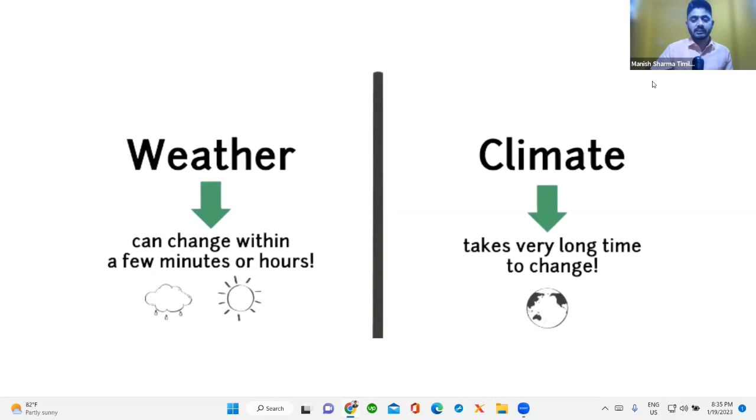Whenever we talk about weather, we talk about a very short period of time, it could be minutes or hours, and we could see several weather predictions based on that. Whereas when we talk about climate, it's a long range of time, basically 10 to 30 years, decades of time. When we talk about climate change, we are not worrying about today it's sunny, tomorrow it will be rainy, a change in weather. We are not worrying about that. Our basic worry is about climate, the change in the climate that has happened over decades.

For example, if this month it's sunny, or it's summer or winter in this month, we would expect next year at this time to be summer or winter as well. But unfortunately, there is a slight shift in the weather continuously. For example, the weather that used to be in January is not the weather it is right now. The weather in January 30 years back is not the same now. And that is what we are worried about.

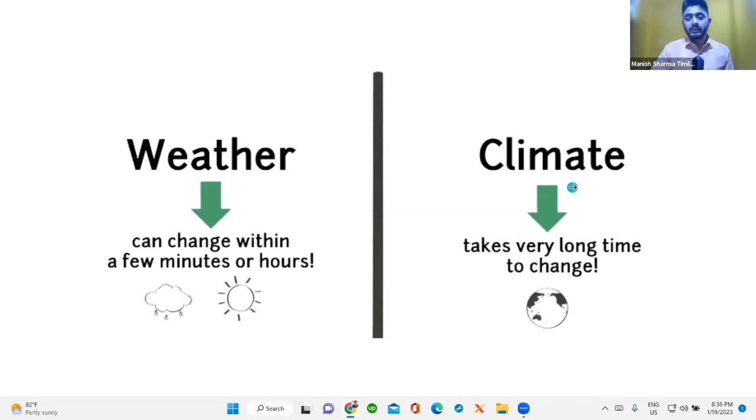So let's talk a little bit more about climate change and its global problem. Before that, we also need to know: is climate really changing, or is it just a buzz topic around the world? Let us figure that out.

Now let us talk a little bit more about climate change.

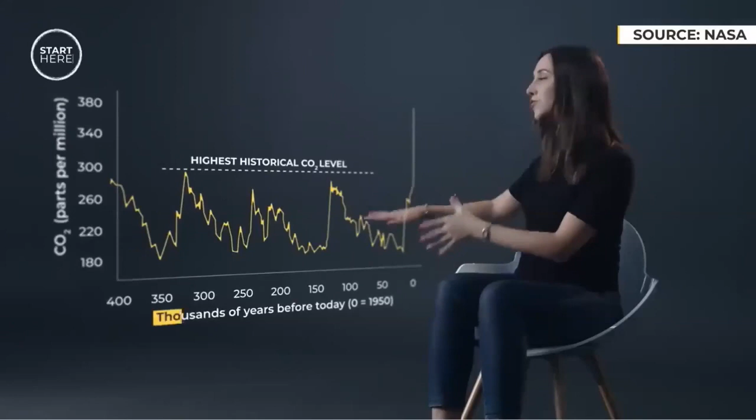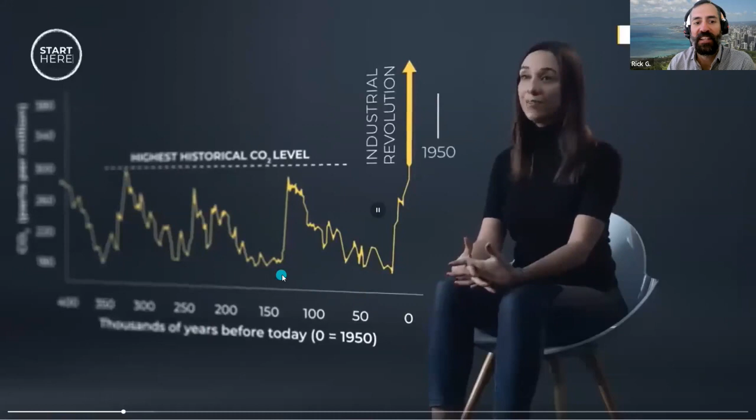I'm not hearing... dioxide, you are not hearing? That took off during the Industrial Revolution, we started breaking CO2 records. Yeah, now we can listen. Manish, do you want to restart the video? We listened to the last 5 seconds, so if you want, you can restart the video from the beginning, if you're able to figure out the sound, because we heard the sound at the end. We didn't hear it at the beginning, and then at the end, the sound started coming in.

So for the video itself, did you hear the sound of the video or just my sound? Yeah, when it first started, I heard like half a second of sound, then it went silent for like a minute, and then at the last 10 seconds we could hear it again. Okay, all right, I understand. I hope now you will be able to. I'm sorry about that, I hope you will be able to hear it now, maybe. Fix it. You can hear it, right? I'm going to take this off with some basics, bear with me.

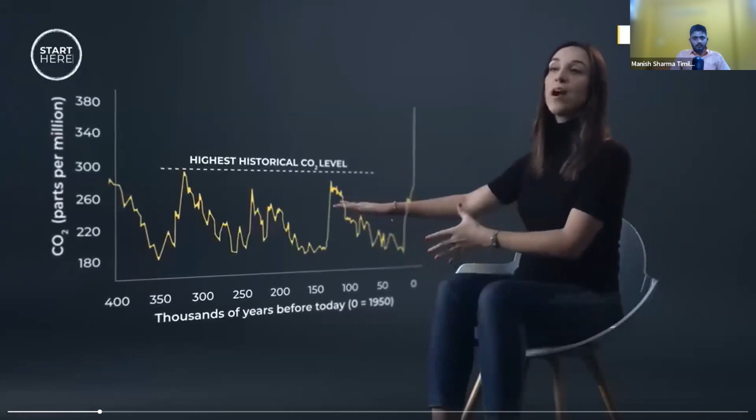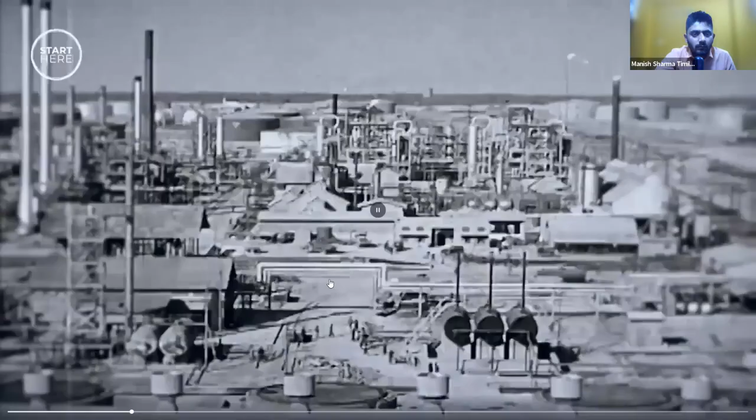This is important, look at this graph. These are the levels of carbon dioxide in our atmosphere over hundreds of thousands of years. But this spike in carbon dioxide at the very end, that took off during the Industrial Revolution. We started breaking CO2 records in 1950, and haven't stopped since. Why? Well, scientists say there's a 95% chance that human activity is the cause.

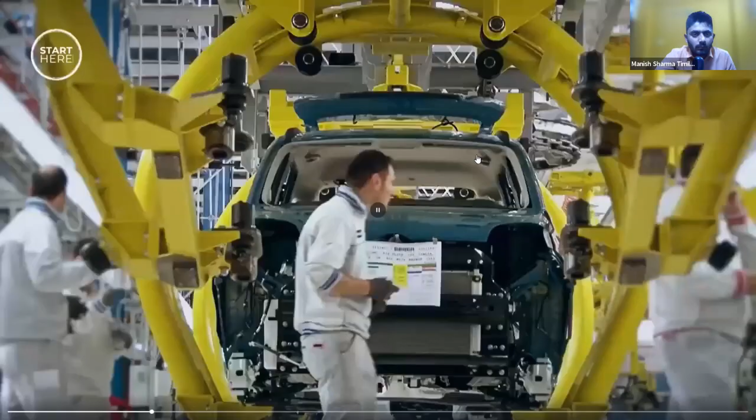We've been burning more and more fossil fuels like oil and coal, which release CO2 to power our homes, factories, airplanes, and cars. There's also a lot more of us—global population has tripled in the past 70 years. And we're consuming more products from animals that release another pollutant called methane. So all those gases are released into the air, and when sunlight gets into the Earth's atmosphere, some of the heat gets trapped and the planet gets warmer. That's why they call it the greenhouse effect.

But the concern is not that the Earth is getting warmer, it's that it's happening far too quickly. It's actually the warmest temperature on Earth since the last ice age, 10,000 years ago. The UN says that right now, our world is about 1 degree hotter than pre-industrial times—that's around the year 1800—which is okay. In fact, the UN says if we warm by 1.5 degrees before the end of the century, we should be fine. The UN even says 2 degrees would probably be all right.

But again, the problem is speed, because right now we're on track to hit 1.5 degrees in only 10 years. And if we don't slow that warming down, it could mean catastrophe within my lifetime, maybe yours too. And we're already getting a taste.

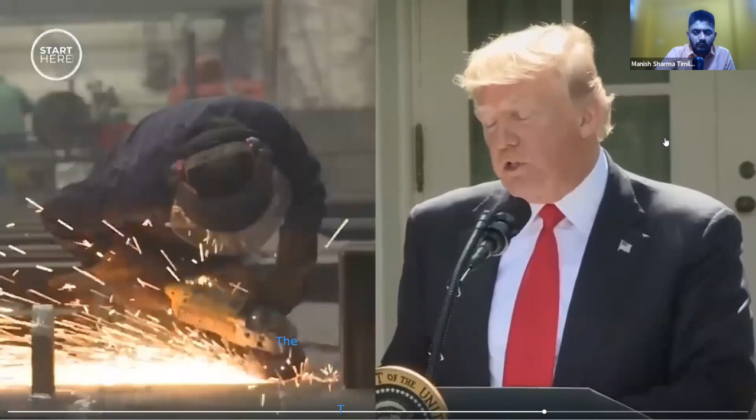The United States will cease all implementation of the non-binding Paris Accord and the draconian financial and economic burdens the agreement imposes on our country. The US, one of the world's biggest polluters, has pulled out of the Paris deal. Russia and China are accused of not giving themselves ambitious targets in the first place. Turkey and Poland want to build more plants.

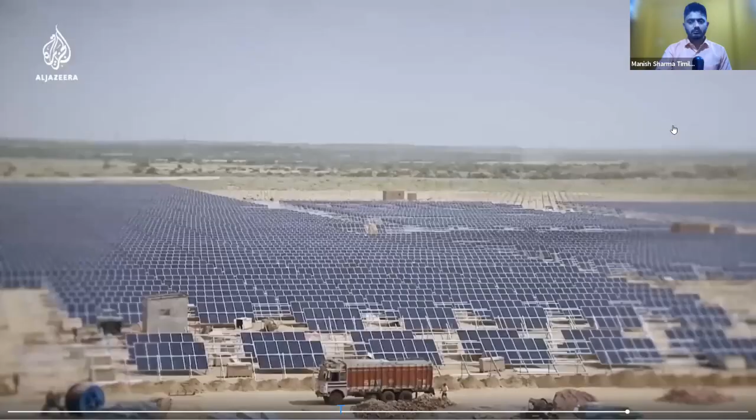On the other hand, there is positive momentum. There's more awareness, and some countries are making progress. India, Morocco, and the Gambia have massive renewable energy projects. So different countries do things successfully. Some countries are, for example, making public transport free in the cities. What a great way to encourage people out of their cars.

But experts say what's needed now is an even bigger push to change everything about the way we run our world. Business as usual has got to change. Politics as usual has got to change. In order to combat that, we have to change the system that has allowed it to happen. You can't have infinite growth on a finite planet.

Everyone can help by shifting to renewable energy, reducing the use of cars, using trains more, cycling more, eating less, and consuming a bit more carefully. So where does that come from? There's only so much bike riding and light bulb replacing that you and I can do every day. The truth is that it's those everyday things that are going to change anyway.

Even coffee could run out if farmers can't grow it. So the expert advice is that it's down to all of us to change our ways and shake things up. Or climate change is going to do it for us.

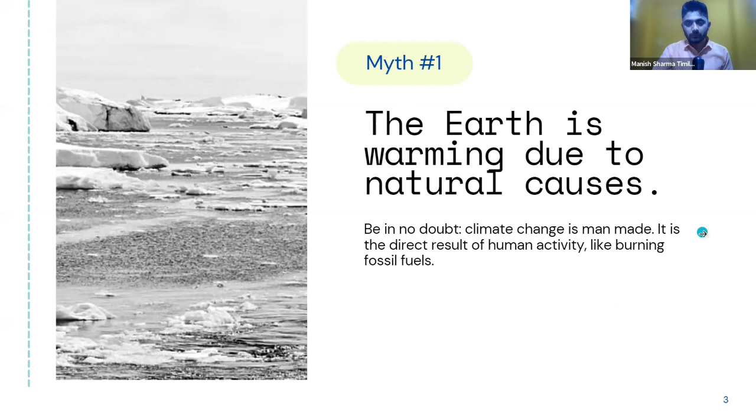The next myth was that scientists don't agree on climate change. We have seen the statistics that invalidate this, and we could see from this fact that climate change is very real, and we must act, we must think about it.

Another myth is that life will adapt to climate change, but we have seen in the video that there are many problems arising from climate change, which we will have to face in the future.

The next myth is that cold weather means global warming is not real. But as we saw in the video, even a 1 degree rise in temperature is a vital problem for us. So even if it is cold in some region, it might be hotter elsewhere in terms of 1 degree Celsius or 2 degree Fahrenheit.

The last myth is that it's too late to do anything. This is also false. We can act and make efforts to mitigate these climate changes by focusing on the ways that I will be presenting today. So it's the right time to act now.

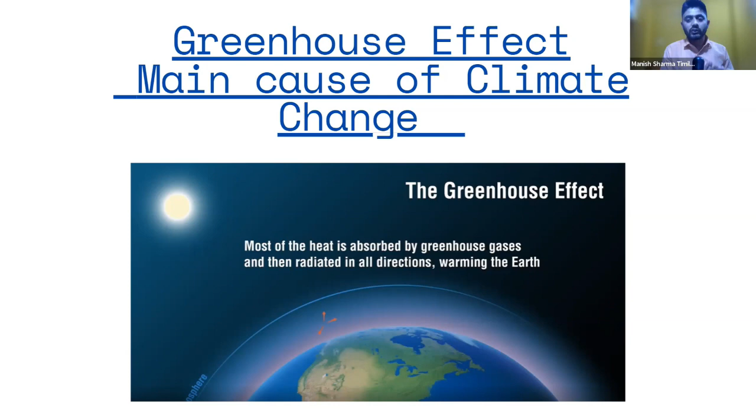So for mitigating climate change, we need to understand the cause of climate change. That was explained in the video itself, that the real cause of climate change is the greenhouse effect. So let us understand what exactly this is.

Our earth has air, and air has a composition of 78% nitrogen, 20% oxygen, and a little bit of carbon dioxide. If we talk in terms of 1 million molecules, then 780,000 out of 1 million is nitrogen gas, 209,460 is oxygen gas, and we have a very little amount of carbon dioxide and methane.

And they were actually our friends. Carbon dioxide and methane are actually the reason why we are surviving here. If it had totally escaped from our earth, we probably would not live, because it would be too cold for us to live on the planet. So they were our best friends before, creating a temperature well enough for us to sustain and live.

So the carbon dioxide concentration of 381 was safe for us, and it is the most required thing for us. But unfortunately, with the burning of fossil fuels, there is continuous addition of carbon dioxide, which is the problem. So the friend of ours that made life sustainable on Earth is turning into a devil right now.

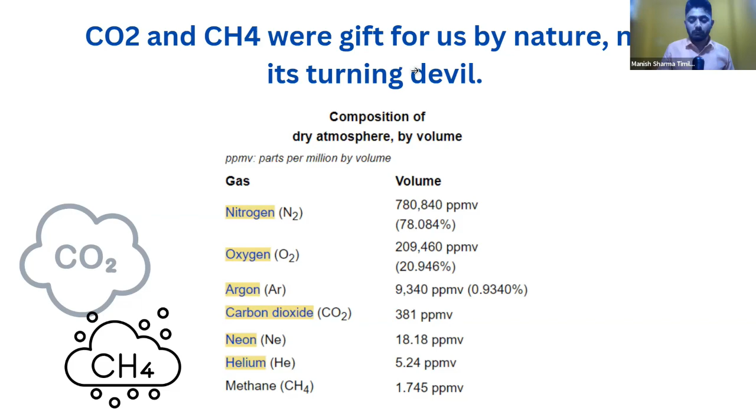Similarly is with methane gas. So now the idea...

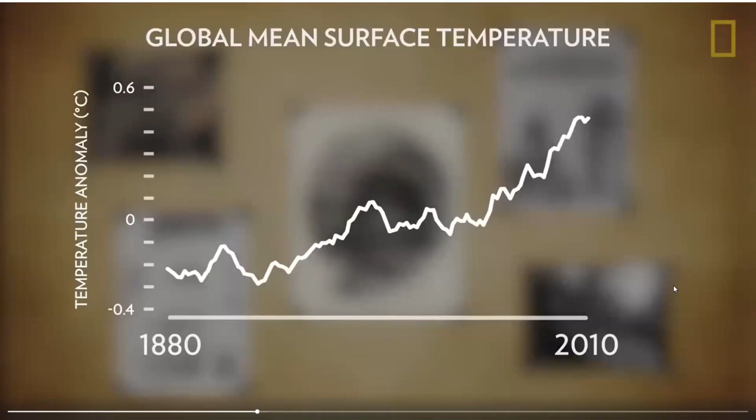Driving up the Earth's temperature and fundamentally changing the world around us. Increasing the Earth's temperature, human activity like the burning of fossil fuels is warming the planet at an alarming rate. While Earth's climate has fluctuated in the past, atmospheric carbon dioxide hasn't reached today's level in hundreds of thousands of years.

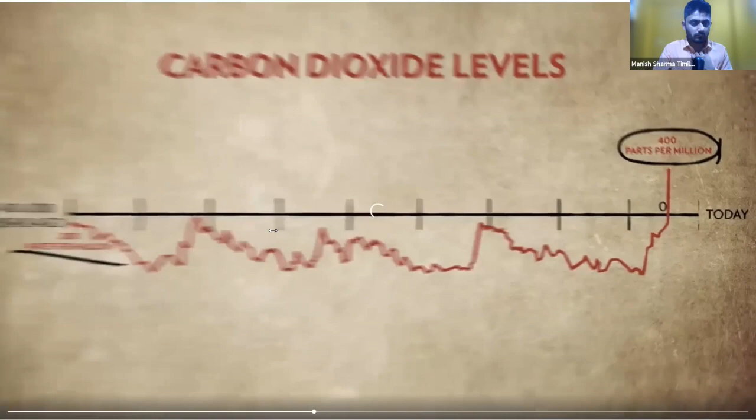Climate change has consequences for...

So the idea is that it is because of several human activities that there is a continuous rise in CO2 concentration. By any means, we should plan for things that would reduce CO2 emission. For instance, when we move, there is CO2 emission as well, which we might need to control. So the idea to mitigate climate change is to have as little CO2 in the earth as possible.

So the idea for controlling CO2 would be to focus on renewable energies. Renewable energies could be our life saviors because they do not emit CO2. The main cause of CO2 is energy, and for energy we are now using coal and fossil fuels, which causes CO2 emission and climate change. If we transition to renewable energies, there will be less CO2, less global warming, and less climate change. So we need to focus on renewable energy.

So talking about renewable energy, let us understand what exactly it is. Renewable energy is something that can be naturally produced. Let's say we have plants - plants are always there, we can make plants grow. There is the sun - no matter how much energy we get from it, it's eternal, we can get energy from the sun every day. Likewise, from water as well.

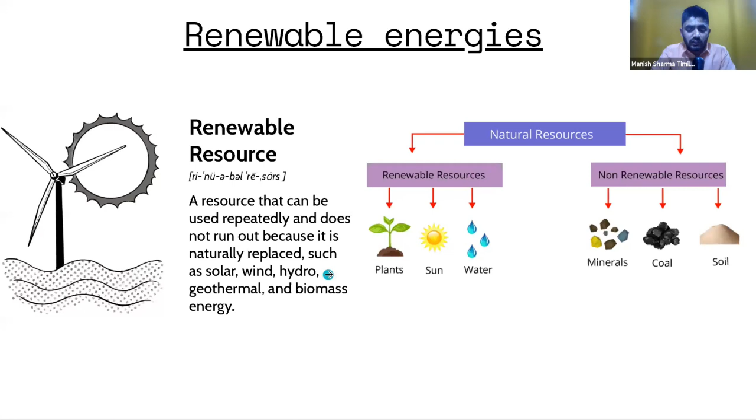more need of renewable energies. So the common renewable energies we have now are solar energy, geothermal, solar hot, biomass, small wind, solar space heating, and so on. But these renewable energies have problems in themselves.

When we talk about the problems, for building solar panels we need a huge land, and that land and the residue of the solar chips cause problems. Once the solar panel gets exhausted, we cannot use it anymore and need to throw it away.

Throwing that away again causes pollution. There are also reasons where there is not even continuous sunlight, because some regions are filled with mountains or hilly terrain where getting sunlight is not that easy. So there is a problem with solar as well.

Likewise, if we talk about other different forms of energy that are evolving right now, one of them could be hydrogen gas. So let's watch this video.

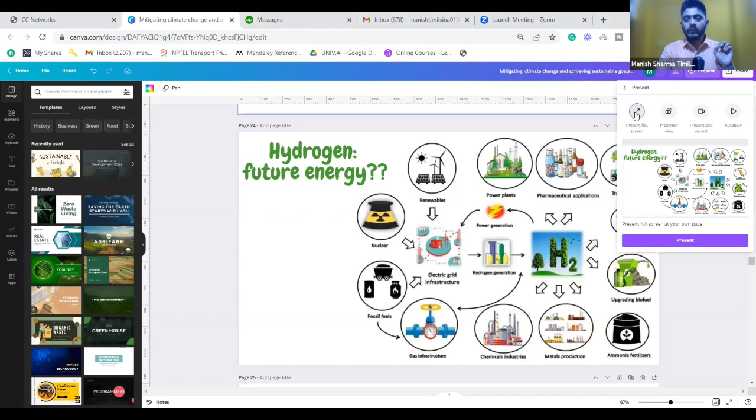Now also hydrogen came into the picture. The main advantage was the energy density, where people found out that hydrogen is very small in size but has massive power. It has been used in many applications, like pharmaceutical applications, transportation, nuclear energy, electric grid infrastructures, and a lot more.

And this energy also had some problems. It is very energy dense, but once it gets very near to fire, it blasts off. It could cause fatal accidents, which might be a concern.

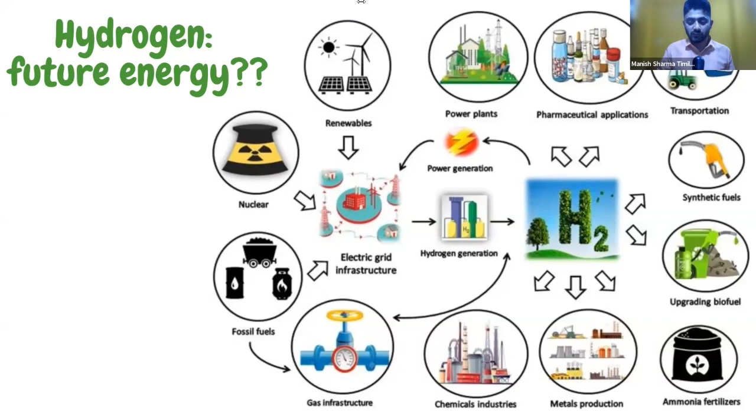So moving on, there is another problem with hydrogen as well. There is gray hydrogen, blue hydrogen, and green hydrogen. Only green hydrogen is applicable for sustainability. And as you said, there are several problems in terms of economy and all.

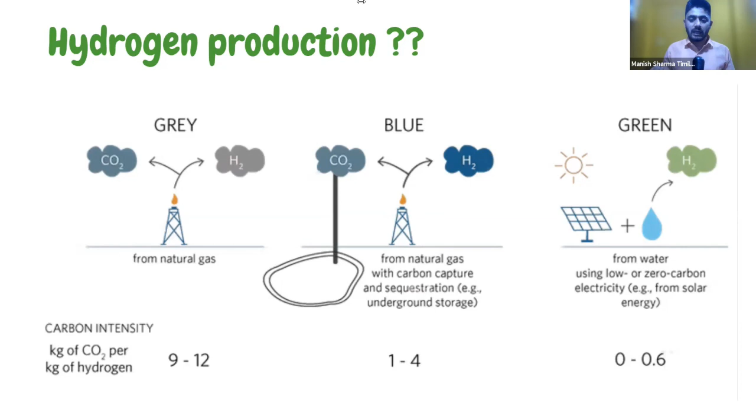Another case is we can't close all the industry. There are CO2 emissions. Let's say if we consider cement production, there are CO2 emissions no matter which energy we use, because calcium carbonate when forming cement decomposes into carbon dioxide as well. And there are many other processes like that.

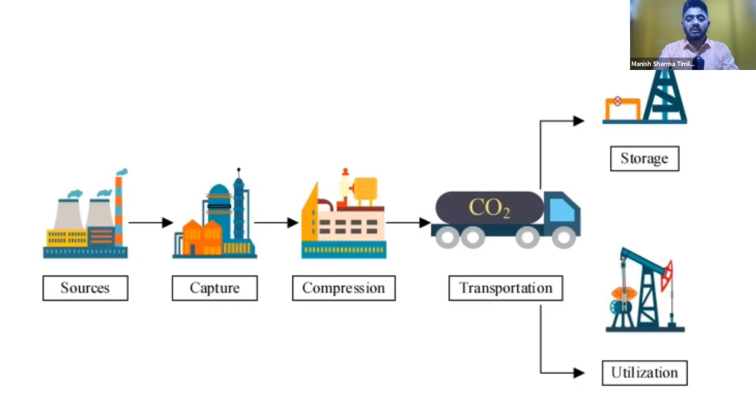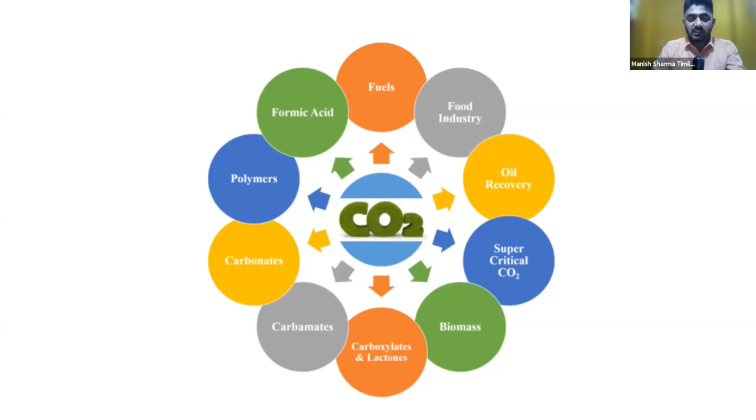So in order to address that, there are many carbon capture technologies. The carbon dioxide, which were our enemies, we can capture and utilize into varieties of applications. It could be used as fuel, as carbonates, polymers, in the food industry, oil recovery, and so on. So the CO2 we're worried about, if captured, could be used for multiple applications. If we are able to capture it, we can also achieve sustainability and create a carbon neutral system.

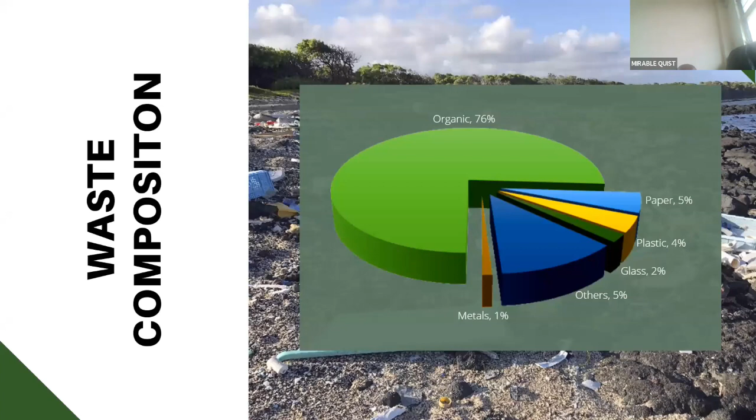Now the problem is not only with carbon dioxide. There are many organic wastes that we see inside landfills. The major wastes are organic waste, which consists of 76%, and there is also plastic waste we need to worry about. We might control emissions, we might use the latest, very dense energy, but waste is something that gets produced all the time—whether it's food waste we throw away, or plastic bottles and plastic waste we throw here and there.

So yes, please, there is a question raised. Please go on. Hello, is there a question? Any question? I think no, we can go on with the meeting. Okay, all right, so let's go ahead. If there is any question, please feel free to ask.

So now I was just seeing Alucine Conte—I see your hand raised. Did you want to contribute something or ask a question? Okay, let's keep going, all right.

So the problem of waste is that because of overpopulation, waste keeps on growing and growing. So there has to be a better solution. My idea is to convert the organic portion of the waste into biogas, which could be used as synthetic natural gas—not totally carbon free, but it will be carbon neutral.

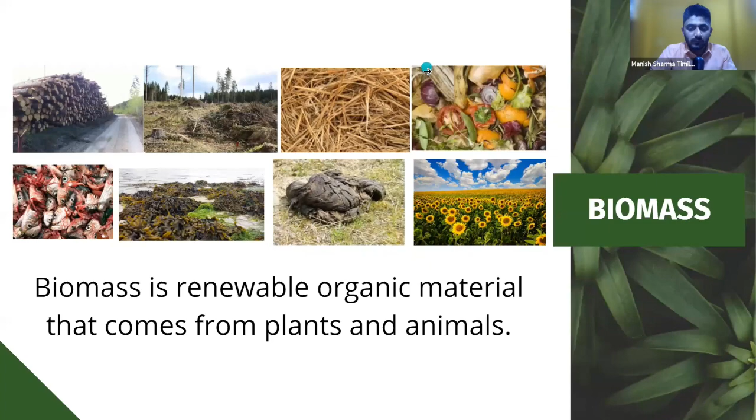Oil is something we can use in a gas engine, internal combustion engine. There are many bio-based vehicles being generated in Europe, especially. So from plastic waste, it can be converted into a petrol-like substance, which can be utilized in replacing fossil fuels as well. But there is a problem with plastic, because when we burn or pyrolyze plastic, there is a lot of tar formation, and we need to minimize that.

So my idea, or the research I'm doing, addresses the next problem with plastic, which is that it is very difficult for us to segregate. Our municipal waste comes all at one place, so it's very difficult for us to separate the waste that goes for biogas and that goes for oil production.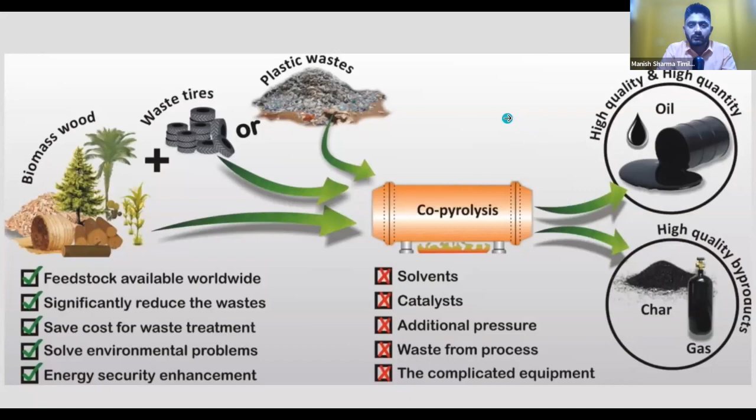So whenever we were talking about hydrogen energy, we talked about it having a lot of financial problems. The more energy we put in, the less we get out. This is what we were worrying about. The energy that was wasted was because of the heat energy caused in the electrolysis process. In electrolysis, there is huge heat that comes in, which we are not able to utilize. But if we could use that heat for the production of biogas, we need that heat. So here in the electrolysis process, the heat goes out, but...

for anaerobic digestion we need heat to make biogas, or we need heat for pyrolysis as well. So if we are able to couple up this process, production of hydrogen, and there is a huge amount of heat that gets out, and if we could utilize that in the places where heat is needed, let's say for pyrolysis or for biogas production, then that would be beneficial and it could significantly reduce the cost for the production of renewable energy.

Also, another good news is that the price of electricity and solar panels, if we see it in recent times, is getting cheaper and cheaper day by day. So we expect that it will be even cheaper in the future, because there is multiple research going on, and there are multiple ways from where we can generate electricity - wind energy and many other forms of energy as well, which is being used for the production of electricity, making electricity cheaper and cheaper. So let's hope for the best, that hydrogen energy and pyrolysis, which require much energy, will be reducing the cost significantly. So this is the future, let's expect that.

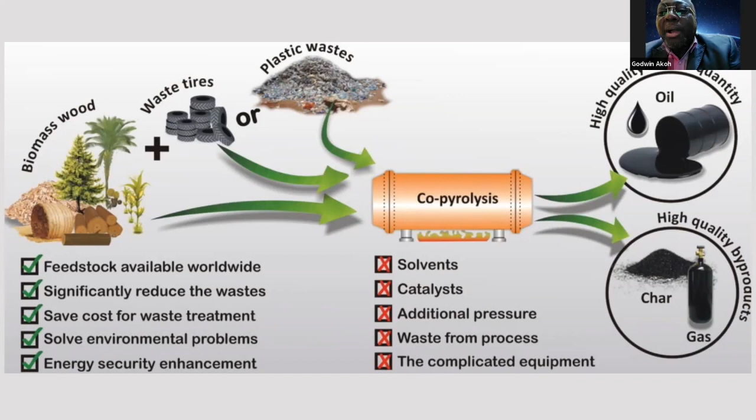Presently, there is some research going on to convert waste to biogas from pit toilets or from septic tanks. But I think that the greater problem that we have is the affordability of the equipment that we can use to power homes or even provide a smaller dimension of electricity. That is the challenge, and I want you to address that.

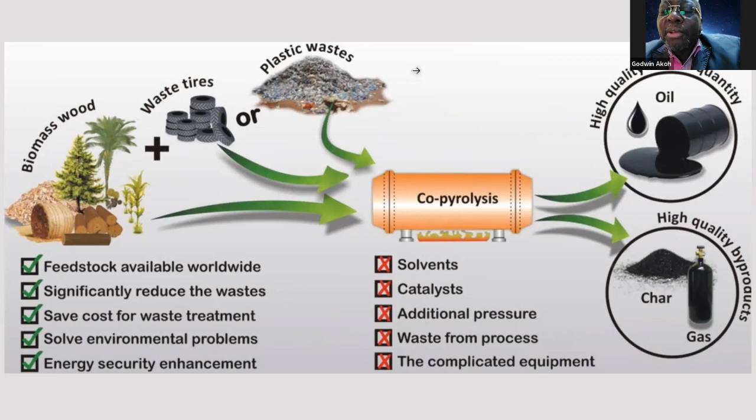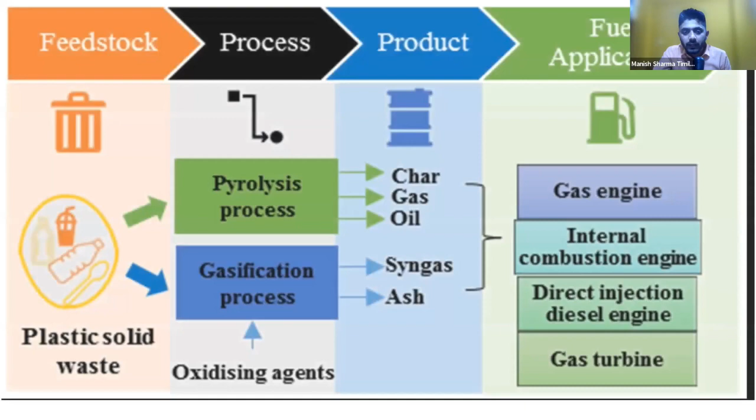Thank you, yeah, very wonderful topic that you brought up - the waste that goes into the toilet to be converted into a resource as well. And that is a very good point, as I highlighted. Otherwise, before talking about the waste that goes into the toilet, let's talk about the animals that produce such waste as well. So consider this - this is manure that cows, or there are a lot of animals that produce.

So these are also a cause for methane emission, and we could use not only the food waste, but manure as well. So we can mix manure, food waste, all the biodegradable substances and produce biogas. So this is also happening in the world. Otherwise, this is a very good point, and we must focus on that as well, because it is significantly reducing the methane that is being produced. So if we could utilize that, that would be a great idea as well.

Are you hearing me, sir? Yeah, I'm sorry. Yes, go ahead.

Yes, one other challenge that I would like this research to address is, can we get usable, small equipment that everyone can afford to connect and use in their homes? It is easier to get some of this equipment, but the important thing is, are they affordable? Can we get them in most of these third world countries where we have large deposits of waste? Thank you.

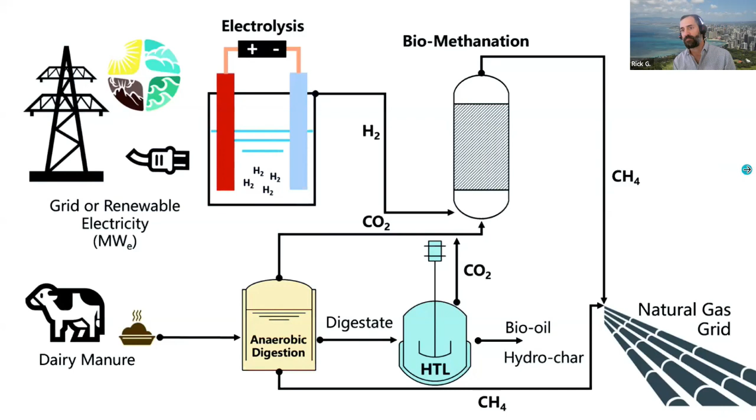Yeah, very interesting point. Let me quickly share something that is going on in my country in the rural areas, which we call gobar gas. So I would love to share about that as well.

There are many regions in my villages, especially in the remote areas, where they have been using biogas, and they are not dependent upon LPG anymore. They are using the gas from the waste that they generate from the house itself. Let me show you some pictures, and the cost is very less. These are the small domes they have at their homes, from which they are generating gas, and it is the real thing that is going on. These are very small containers, and household rural areas are also focusing on renewable energy, and they have been using it.

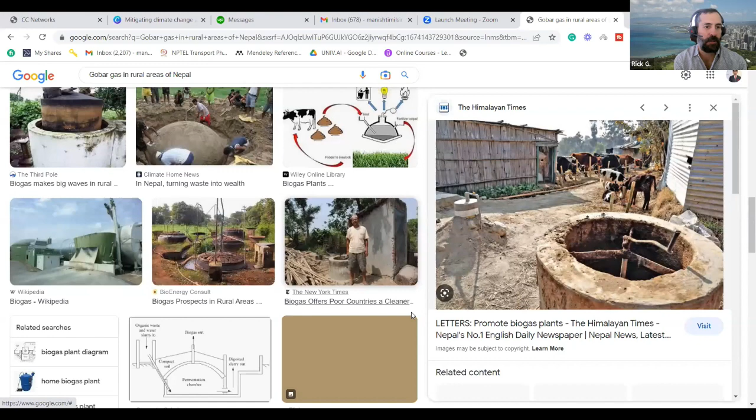Fantastic. I think, Manish, those examples are basically, I mean, they're not free, but they're almost free. The cost of making those is basically labor and a little bit of cement, not too much. So I think that's an excellent example of how we could implement the technology immediately.

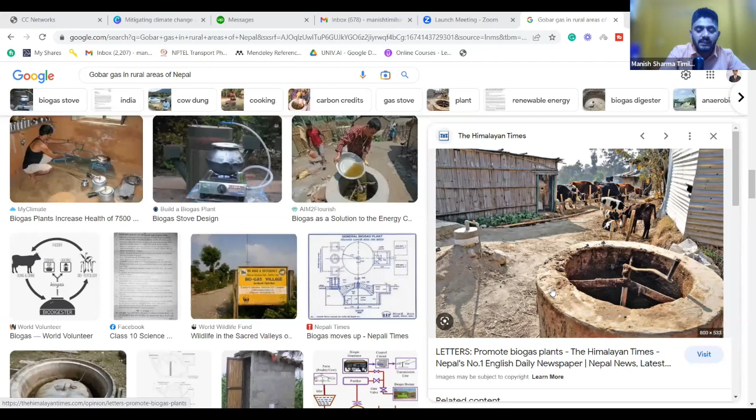So if you could see here, there is a cooking stove right from the biogas. So this is the biogas. We are getting gas from here, and this is being cooked here. So we can get some amount of calorific value of gas that can be applied.

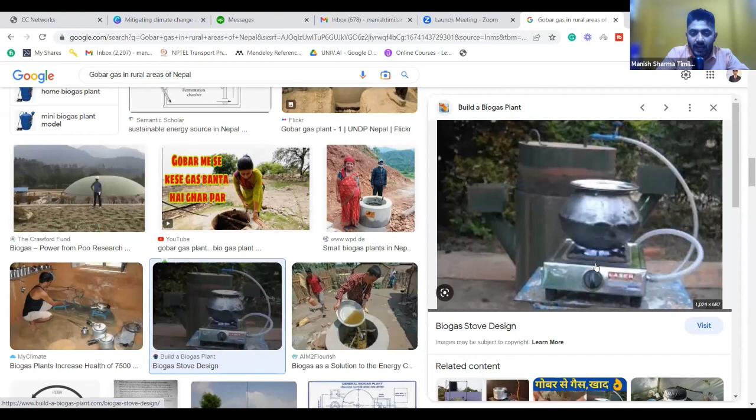Fantastic. And Danielle, I want to call on you. Danielle, Noel, you have your hand raised. Please join us. Good afternoon, everyone. Good afternoon.

Yes, I really appreciate the program because we're given an assignment on biomass. I'm calling from Cameroon, Douala precisely. Yes, I have two questions.

The first question is, the presenter, Mr. Manish, talked about the renewable energies which could make our life safe. I would like to find out, first of all, he said also about electricity. The electricity is produced through solar energy, that could also reduce the price or amount of the electricity payment. But the fact is that here in our country, the bill of electricity is still very high, whereas we are already using solar energy. So I don't understand what could be the link with the biomass.

Second question, we are talking of biomass, and I did research according to the assignment given to us, concerning the fact that biomass is organic waste, the sum of many organic wastes. That means waste from plants, from animals, from houses, from wood, anyhow, is many waste that could make the residue called biomass. So now my question is, what about the waste that comes from human beings after digestion? Because I know that is used also for fertilization, for the plant to grow, for us to have fruit again that we eat and swallow after we reject again. So what about that? Because during the presentation, I've not seen the classification of that particular waste, whereas it's a waste that is useful to the plant. Thank you.

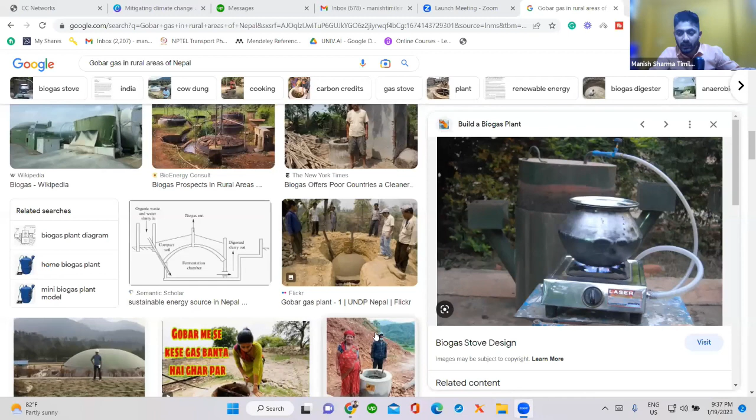For the images that we saw, let me show you these images again. These are a little bit far from the settlement area, and we just get a pipe from it into our home. This is a little bit far, maybe like 100 meters away from the house itself. We can get a pipe from it, and the pipe is not taken straight from above, but from underground, or managed in a way so that there would be minimum leakage.

Yes, and I don't think there's any additional risk than what we've already been doing with millions of people who get supplied gas in their homes. There's always a slight risk with handling methane since it's flammable, but that has been used by millions and millions of people throughout the world who use natural gas to power their homes. So we have precautions that can be taken to mitigate those risks.

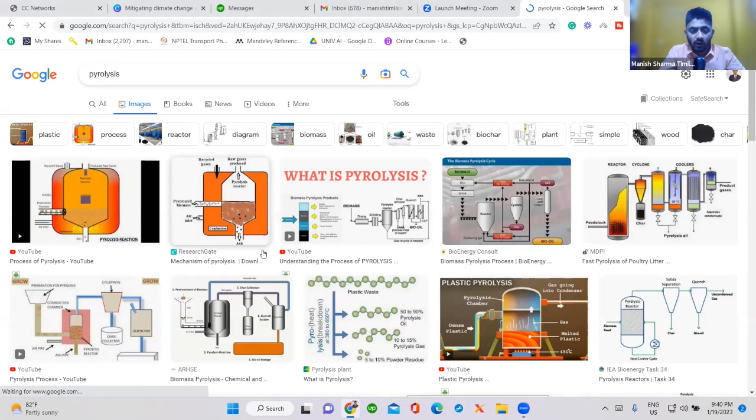Now let me share the picture of pyrolysis. How does that look like? The pyrolysis will look something like this. We will have a container and we will not feed oxygen to it, so that it will not decompose into harmful gases.

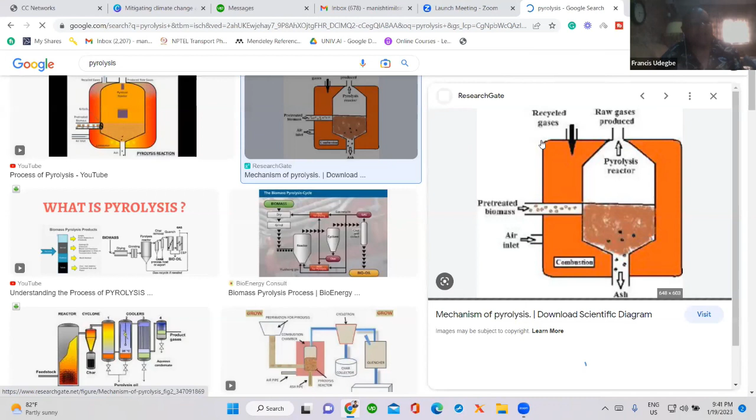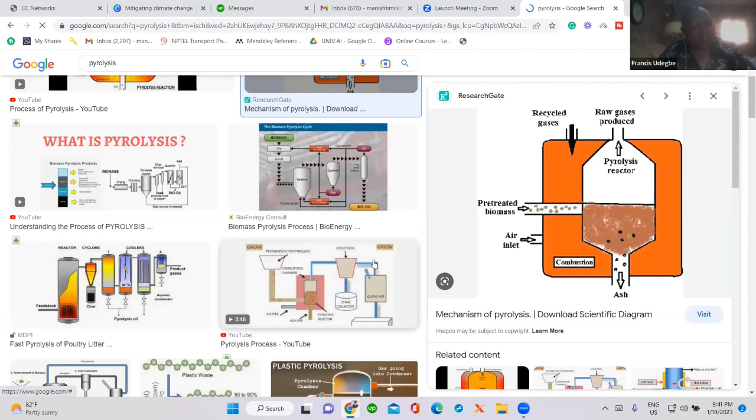If I can come in again, at a point pyrolysis starts with gasification, where you control the amount of oxygen that goes into the system. At a point in the pyrolysis, during oxidation or reduction, oxygen must come in. So you see, we still have that problem. We have to be very careful with the fumes that must be generated.

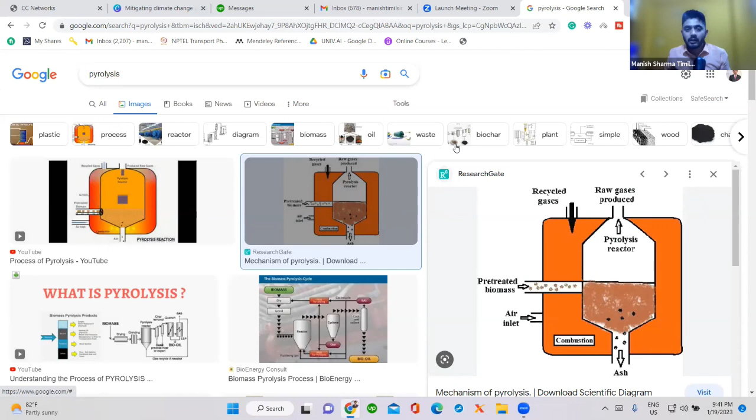Yeah, there are also many other technologies, like I discussed about carbon capture. There is scrubbing technology we can add after pyrolysis, where we can convert the fumes and dissolve them into liquid to have it safely disposed as well. We call it scrubbing. That is the process by which we treat the gas that comes out.

Where I think it is showing a different image. The main gas that comes is H2S, for which we can use a scrubber. Let me show you the picture. We have to invest in a lot of cleaning agents, scrubbers, cyclones, and all that.

That's what I foresee with this kind of project. And of course, your gasifier will be very, very large. If you have to put in wood, chopped pelletized tires and other materials, your gasifier will be very large, and probably it will be a downdraft gasifier to be able to accommodate all this.

Right, thank you very much, it was a very wonderful one. Thanks, thank you very much Francis for that key contribution and comments.